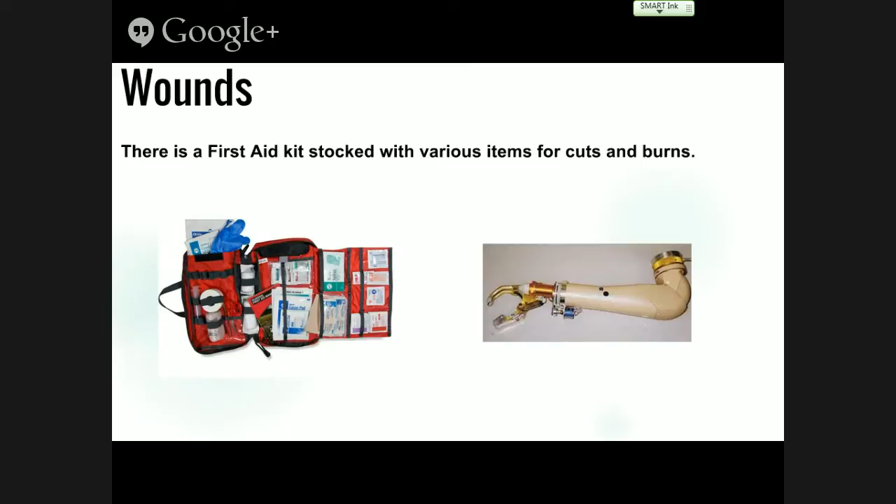Part of being a safety captain is knowing how to take care of wounds, so we have a first aid kit with various items. We have gauze pads, just in case you have a cut, to stem the bleed. We have ice packs in case you get hit with something and have swelling. We have gloves, alcohol pads, bandages, but we do not have prosthetics. So please don't amputate any limbs, because that would be really, really bad.

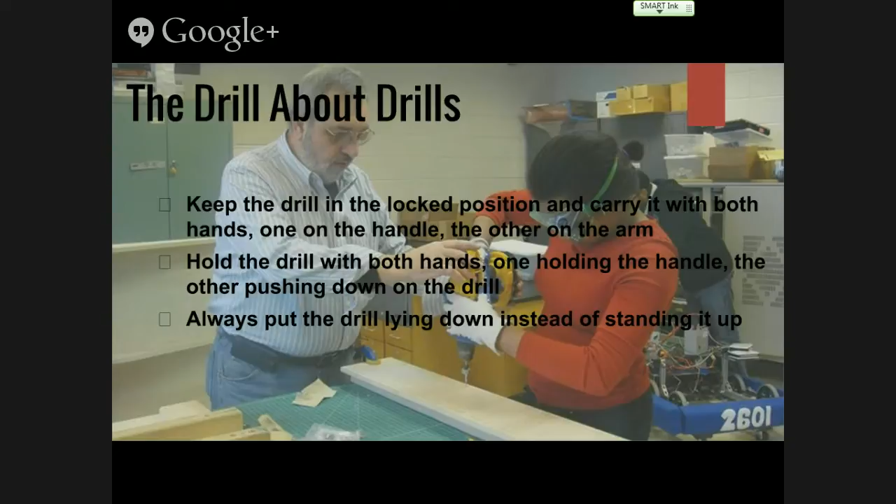Now, the drill about drills. When carrying a drill, keep it in the lock position and use both hands to carry it, one on the handle and the other on the arm. Hold the drill with both hands when you're using it, by the handle and by the arm as well. And always put the drill lying down instead of standing up, because if it's standing up it's more likely to fall and hurt somebody.

Now, soldering. Always wear face protection and use a mask. Solder in well-ventilated areas. Never touch the iron because it's hot and you could burn yourself. Always keep it in its holder when you're not using it, because that would prevent it from falling and hurting somebody else. Also, wash your hands after soldering and use lead-free solder.

Now, with great power comes great responsibility. When using an electrical power source, always power down the robot by opening the main circuit breaker. This you should do when people are either working on the robot or nobody is in the pit. This would prevent anybody from accidentally getting hurt by the robot, just in case it misfires.

Also, if you have any pneumatics on your robot, be sure to release all the pressure. That would decrease the chances of anything like firing and hitting somebody. That actually happened to Marcus last year during the competition. The robot shot his catapult and hit him right in the head.

Okay, so batteries are life. So you want to take good care of your batteries, and do not use any damaged batteries, because if you use any damaged batteries, you have a chance of it exploding.

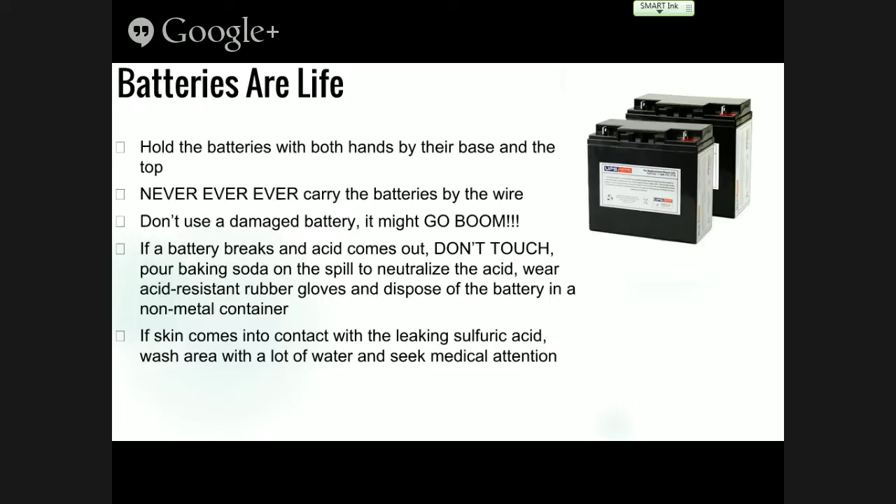Now, if anybody is injured, you have to tell a mentor, send the injured person to the EMT, and fill out a medical incident report form. That's the standard procedure if anyone gets injured, and it's important to follow that, because you want to take care of the person immediately to prevent any other damage that might occur.

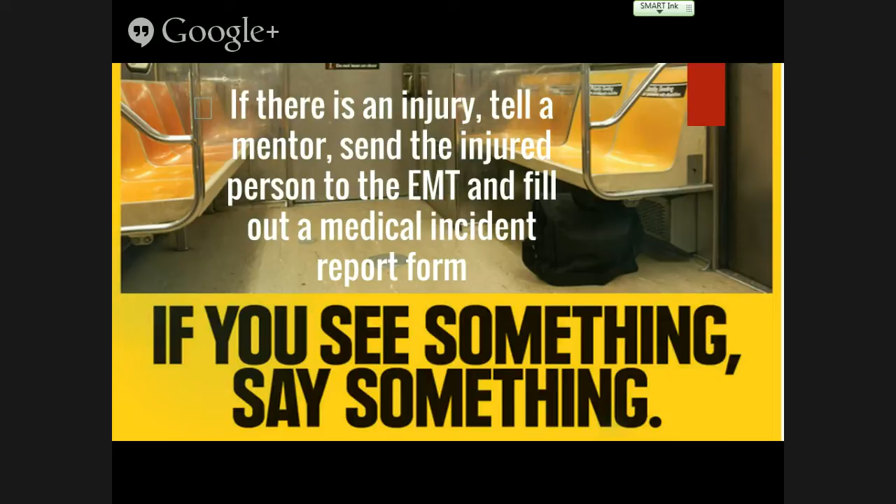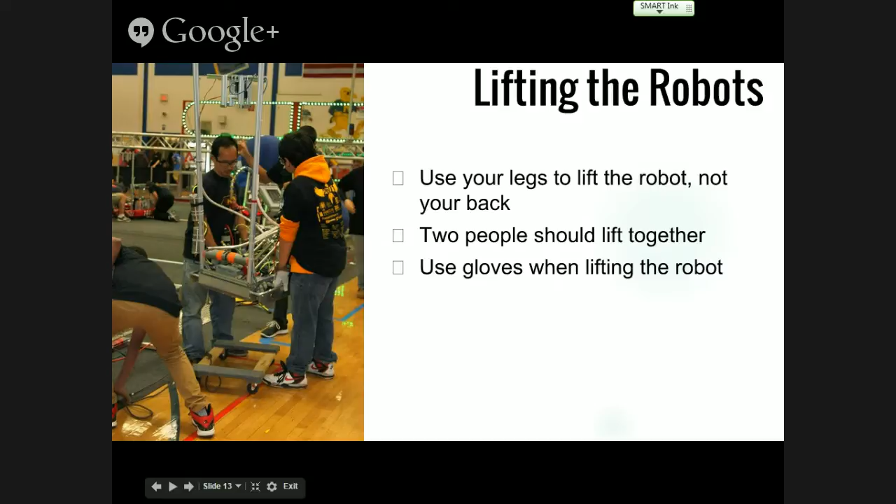Now, when lifting the robot, always use your legs to lift the robot and not your back. Two people should always lift together, and use gloves when lifting the robot.

The most important rule in safety is use your common sense. Common sense is like your best friend for life. Common sense will keep you safe most of the time, and always be aware, be rational, and don't be immature.

People are in unsafe situations. Their lives are in your hands. You have 1 minute to name 3 unsafe things and describe how to make it safe in order to save each person. Okay, guys, we gotta save all these people.

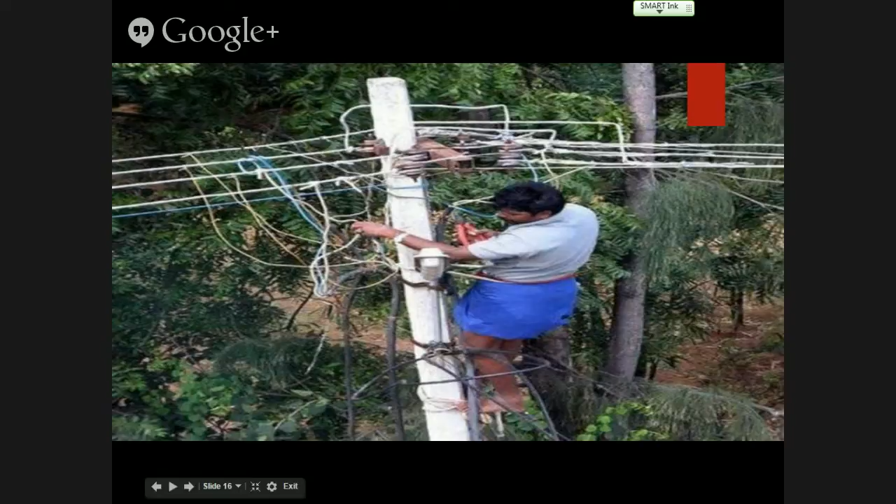Alright, guys, name 3 things, 3 unsafe things. Anybody raise their hands? Okay, that's 1. That's 2, one more. Alright, that guy is safe. Good job. Now this one. Marcus? Okay, that's right, good job.

Anybody else? Come on, we need 2 more things, or else it's gonna... Yeah, that's another thing. Okay, one more, got like 30 seconds left. Come on, Marcus again. Okay, alright, he's safe now. What about this guy?

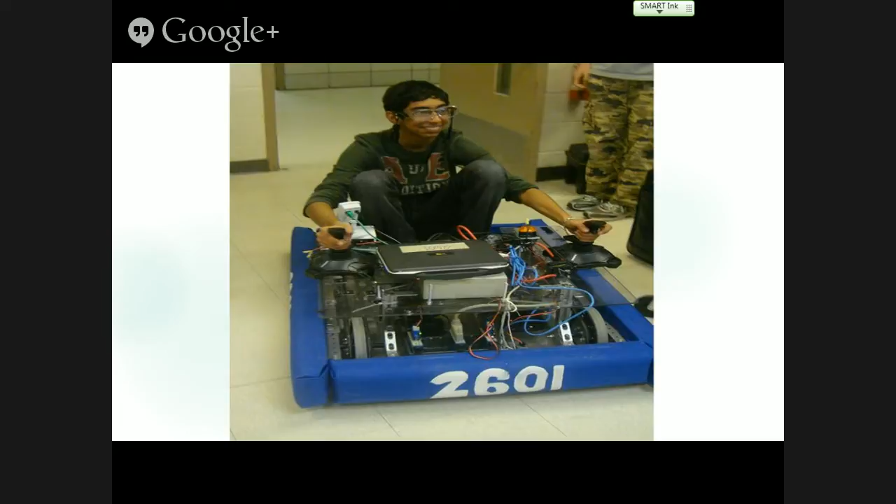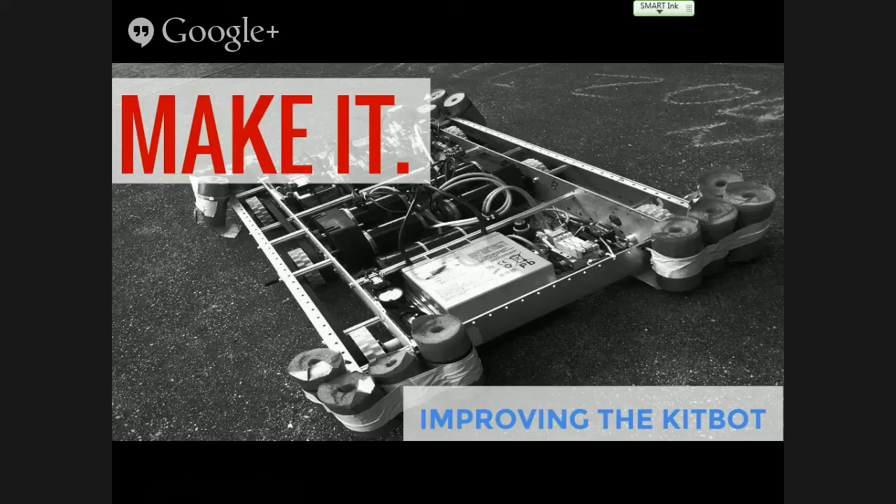Okay, hi, my name is Jan. I'm the president of the robotics team here at Townsend Harris, and I'm going to be telling you guys about drivetrains.

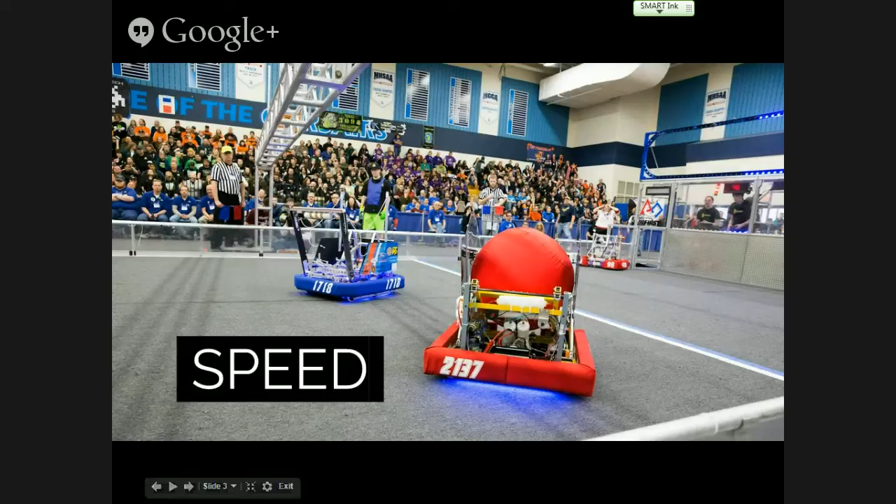Okay, so what is a drivetrain? The drivetrain is basically the mobility of your robot. It's how we move during the game, and it's very important. But what do we want from a drivetrain? What we want from a drivetrain starts first with speed. You want to be a fast robot to be a competitive robot.

But with speed, you also need pushing force, and pushing force is to get out of sticky situations like T-bones. And with that you also need agility. So we need speed, pushing force, and agility to have a very good drivetrain and a competitive robot. And what are we given by FRC?

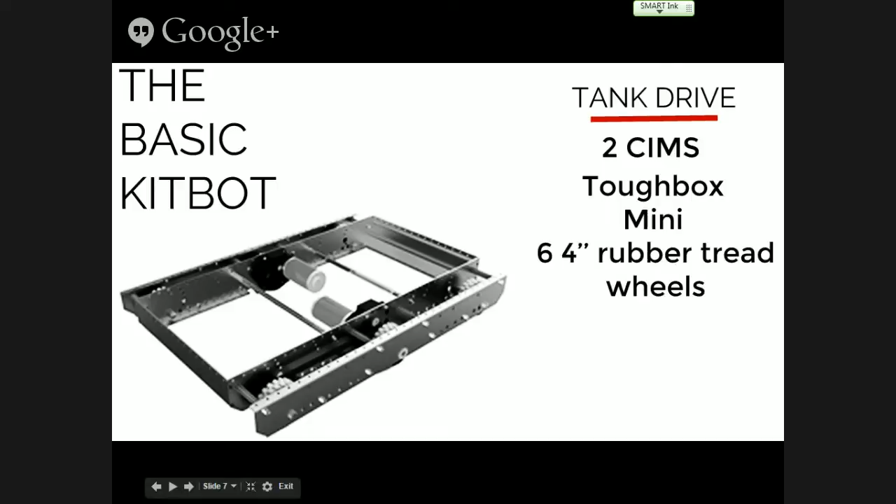We're given the Kitbot by FRC, and what does the Kitbot give us? So the basic Kitbot is a tank drive. And with this tank drive we have two CIMs - we have a Toughbox Mini, which is the gearbox, and we have six 4-inch rubber tread wheels, and we'll get to the speed later. I'll show you how to figure that out.

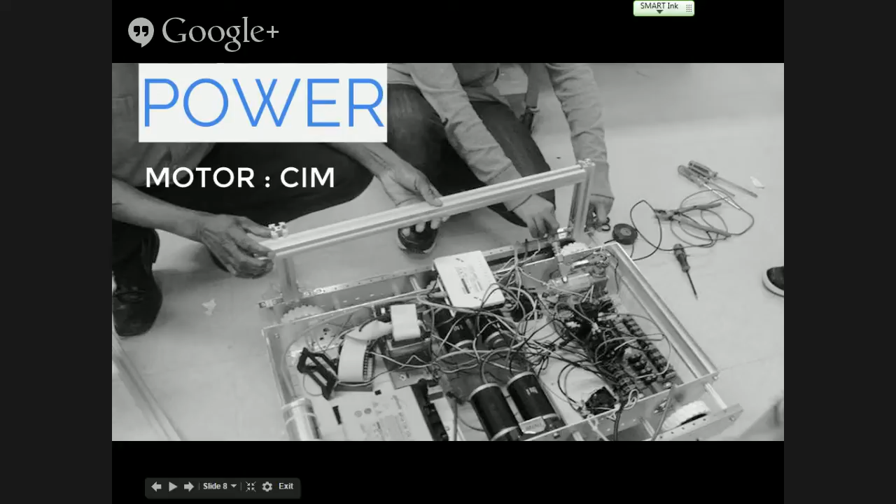So first we start with power, and our power is given to us by CIMs. So these are the CIM specs: we have the free speed, which is the rotations per minute - basically how fast the motor allows you to turn the wheel. And we have the stall torque, which is the rotational force. So basically what we learn from this is that more CIMs equal more power.

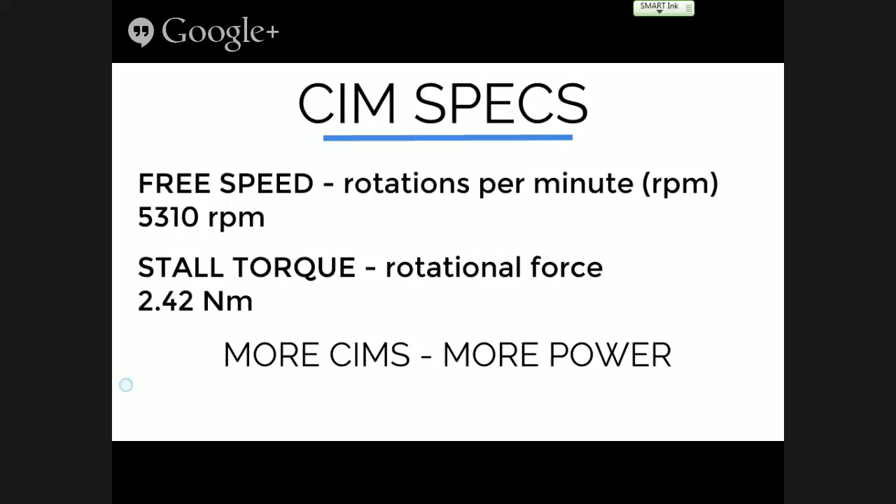Next we have the reduction. If I were to stick a motor straight onto a wheel, it would rotate 5,310 times per minute. That is too much, and it would be unsafe on the field, and you wouldn't really be able to drive with it. So what we need is a gearbox, and the gearbox that's given is the Toughbox Mini.

So we're going to talk about gear ratios. In the Toughbox Mini, we have a 14-tooth gear, 50-tooth, 19-tooth, and 45-tooth. The gears have these teeth to pretty much give it an identity, and it makes sure that they work together to create a different gear ratio that states how fast your wheel will be moving.

First stage is 50 divided by 14, and then the second stage is 45 divided by 19. The reason we're dividing these is because we have to divide the driven gear by the driving gear. The driving gear here is attached to a motor, which drives this gear, and then this gear drives the 19 one. So now the 19 is a driving gear, which is then driving the 45 teeth gear. Are we getting that?

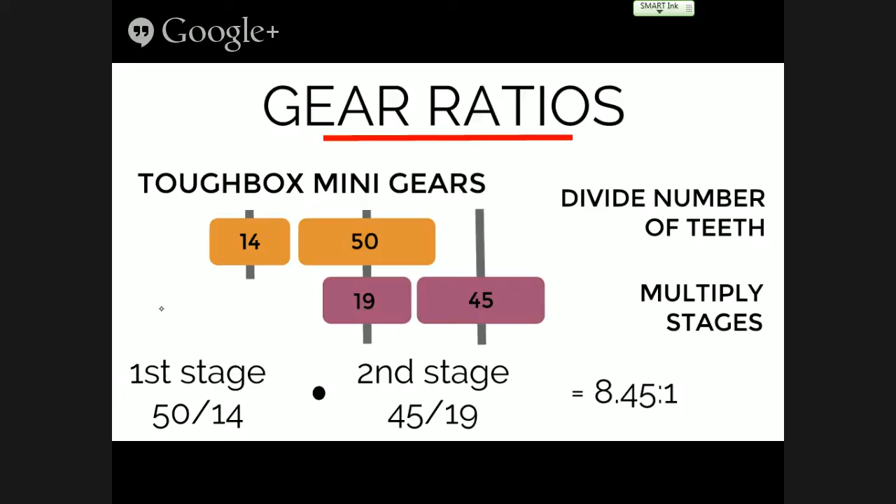Okay, so this is only the different gear ratios for each separate part of the gearbox. Now we need to bring it together to get the overall gear ratio. To do that, we multiply the stages. So we multiply 50 divided by 14 times 45 divided by 19 to get an overall gear ratio of 8.45 to 1.

Now what does this 8.45 to 1 gear ratio tell us? First, it tells us how fast our wheels are going to be moving. To figure that out, all you have to do is divide the rotations per minute from your motor by the gear ratio that you have, and you would get the rotations per minute of your wheel. Next, we get the torque that is given to the wheel. To do that, you would multiply the stall torque given by the motor by the gear ratio that you have, and you would get the torque of the wheels.

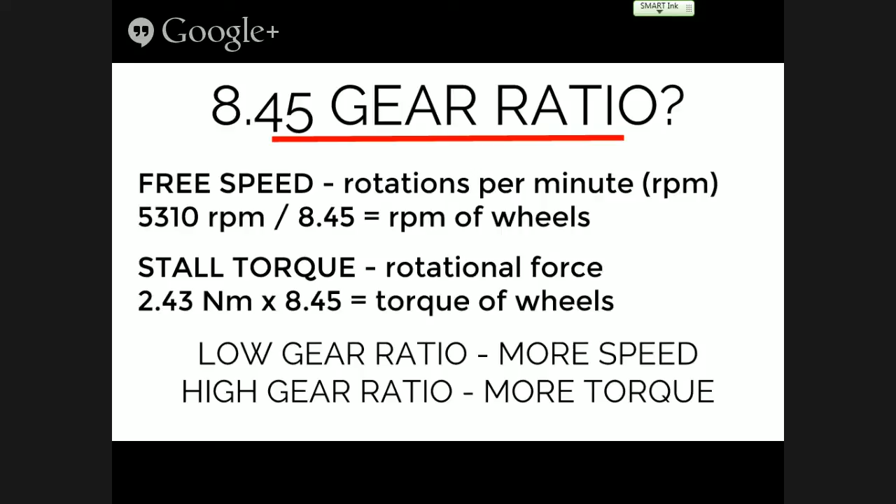So with this, we see that there's a give and take situation. When you want more speed, you have to go for a lower gear ratio, and when you want more pushing force or torque, you would need a higher gear ratio. So the rotations per minute really helps us in figuring out the speed of your robot.

So what we're given is the RPM, which is the rotations per minute. This is the angular speed, so it's how fast it's rotating. We need to change that into a linear velocity, and velocity is just speed. So we use this formula, which is the linear velocity equals the angular velocity times pi times d, which is the diameter of your wheel.

So with that, we go into wheels. The wheels that we're using in the Kitbot are 6 4-inch rubber tread wheels. Now, why are we talking about wheels? Why would that be important in a drivetrain? Well, pretty much it affects the speed and torque that we're given.

The linear velocity is affected by the size of your wheels. It's the diameter that affects it the most. It also affects the pushing force for the same reason, the diameter that affects it. It also creates frictional force. While we're driving, there is a force that is fighting against us, so we don't want to drive, but we have to beat that force to actually drive. The size and material of your wheels matter in your drivetrain.

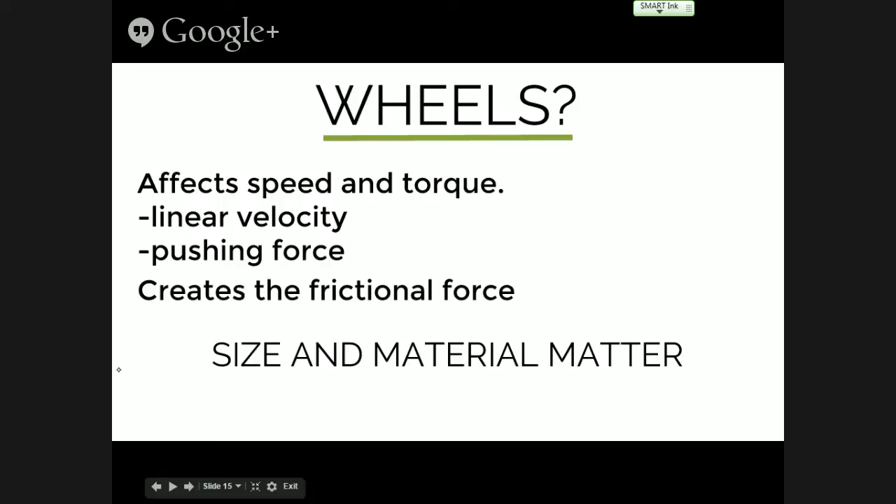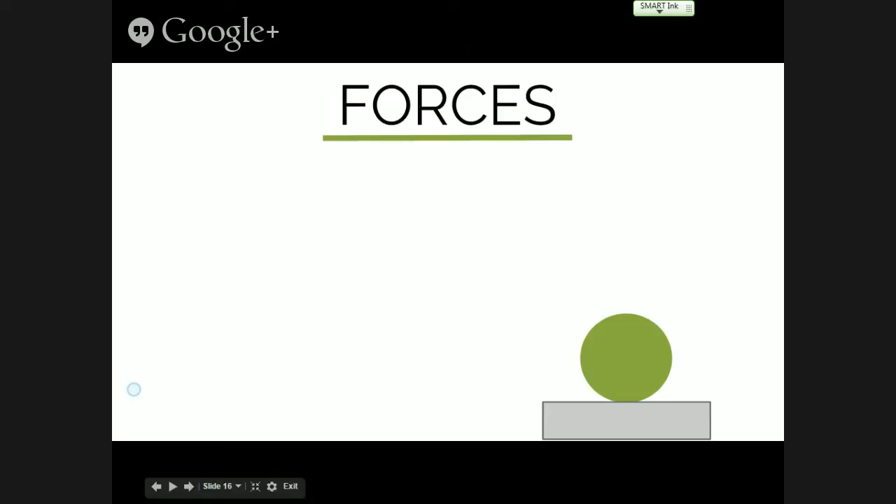Now we're going to talk about forces that are happening inside this drivetrain. So that's a nice wheel on a carpet. We have the gravitational force, which is basically the weight of your robot. To find that, it's just mass times gravity, and gravity is a constant, which is 9.81 meters per second squared. This force is going down because gravity is pulling us down.

Next, you have the normal force, which is basically the support force. It's the force that we are pushing on, pushing back on us. So the normal force is going against gravity. They're both equal because we don't have a wheel flying up in the air, so they're the same here.

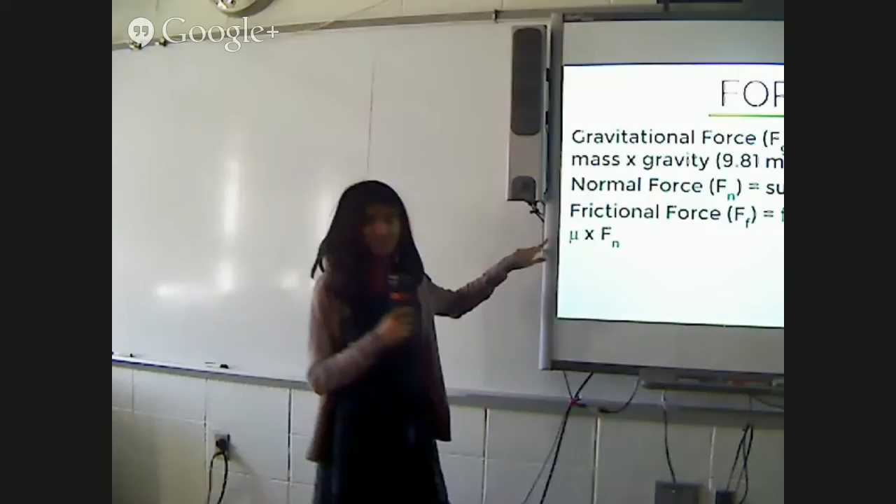Next, we have the frictional force, which I like to call the fighting force in this situation. To get the fighting force, you need the friction coefficient, also known as mu, which you can find on AndyMark. They tell you the coefficients of your wheels on carpet, because that's what we use.

Next we just have the force that's given to the wheel, which is going backwards. So the frictional force is what's making us drive.

So we're seeing with the Kitbot, it's either a speed or pushing force situation. But why not both? I present to you shifters, the way that you can get both in a very simple and easy way to attach to your Kitbot. What we used was the 3 CIM ball shifter.

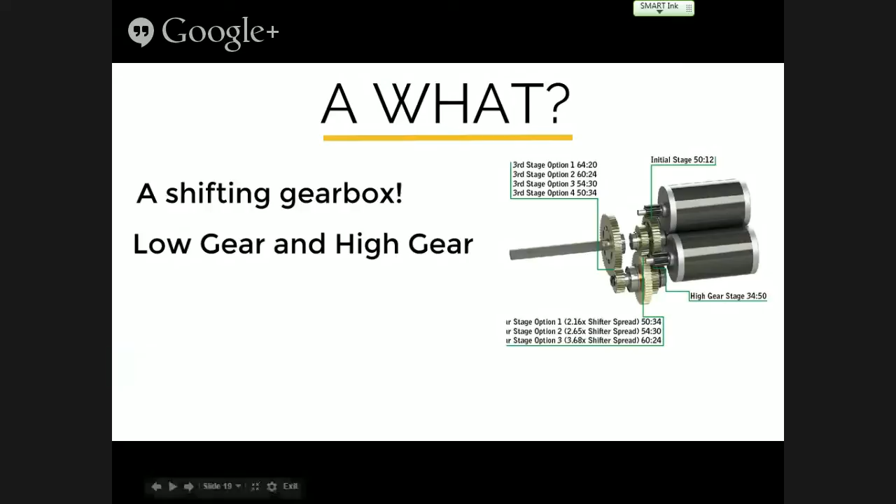What's a shifter? Basically, it's a shifting gearbox. In this situation, we have both a low gear and a high gear in this gearbox, so we get both speed and pushing ability. But how do we do that?

So first, we have to engage these gear ratios, and to do that we have 2 main methods. We have the ball shifter, which engages by using pneumatics to put balls into little holes around the side, engaging the gear. Then we have the dog gear, which does the same thing, but in a weirder way — it has to fit into those specific holes that were made.

And when it's only on one stage, the 50 tooth becomes an idler gear — right now it doesn't matter, it's going straight from 12 to 34, so it's only one stage. So you'd divide 34 by 12, and you get 2.83 as the high gear.

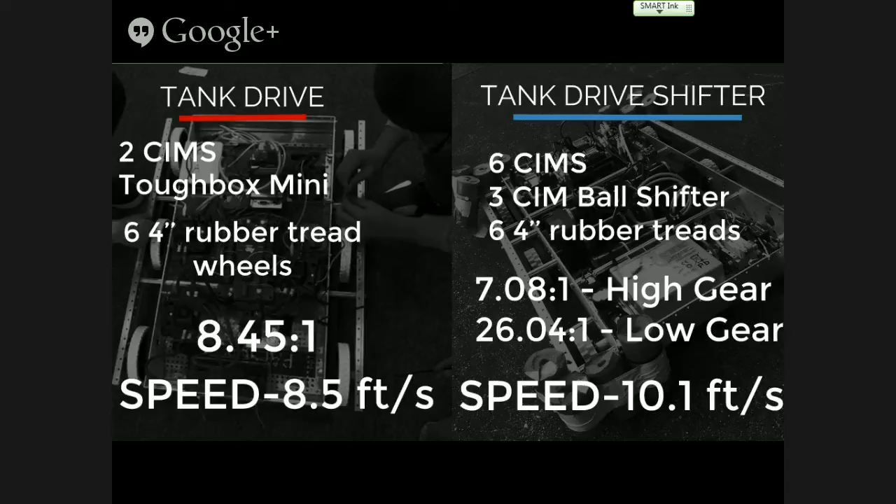With the tank drive shifter, we have 6 CIMs, a 3 CIM ball shifter as our gearbox, 6 4-inch rubber tread wheels, and both a high gear and low gear ratio — 7.08 to 1 for high gear and 26.04 to 1 for low gear, giving us a speed of 10.1 feet per second. So as you can see, it gives us more speed, and also the ability to push if we need to. We have videos from

the summer when we tried using shifting gearboxes.

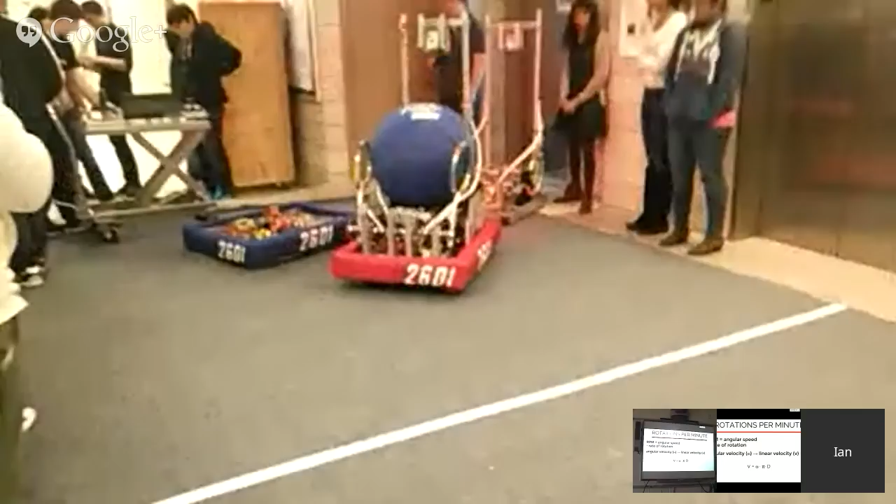Could you film for me? Point this at the robot. Right now it's live streaming.

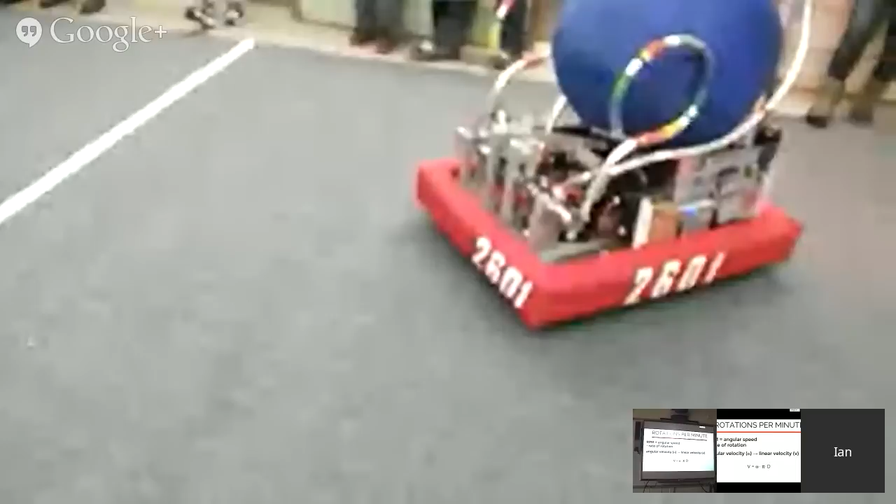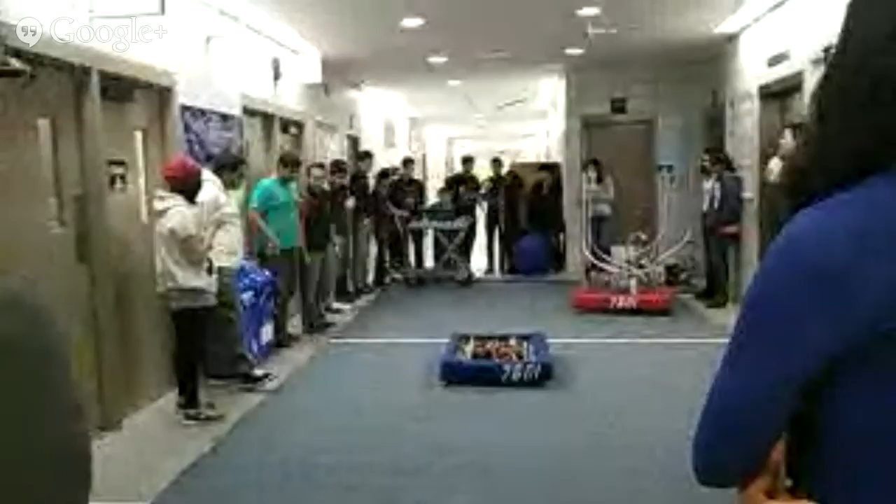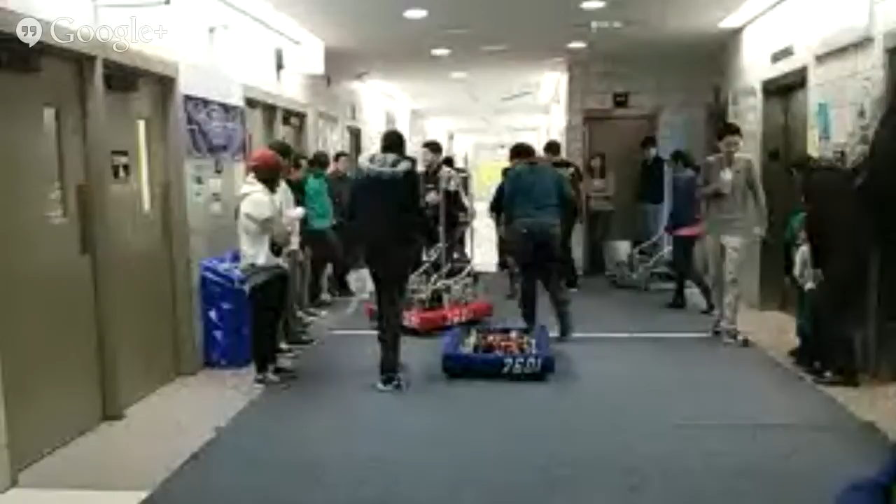Yeah, I know, I saw it. Wait, Ian.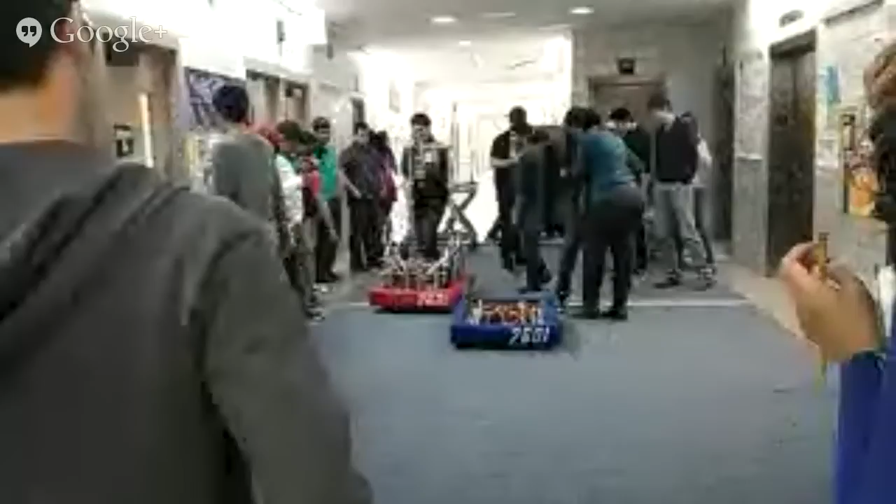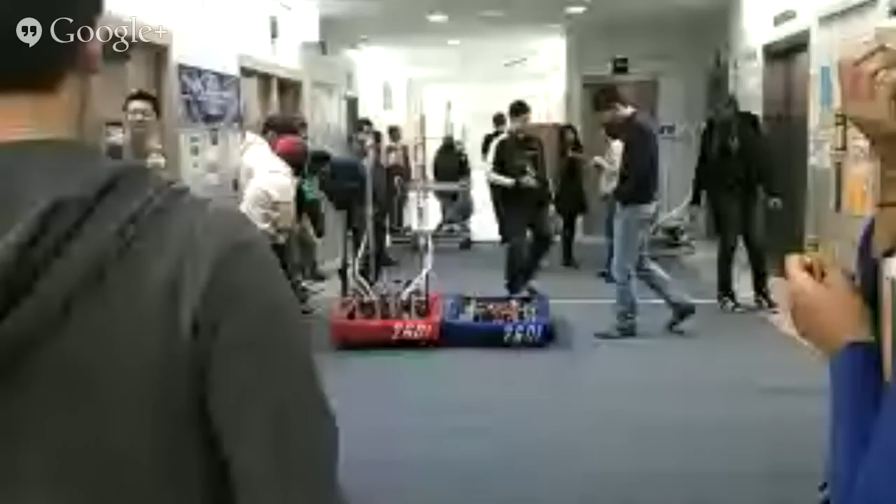We were actually over in Toronto. And what was really funny is they went to weigh in the tanks, and so we drained the tank. I don't know how much weight air really is. Compressed air has quite a bit.

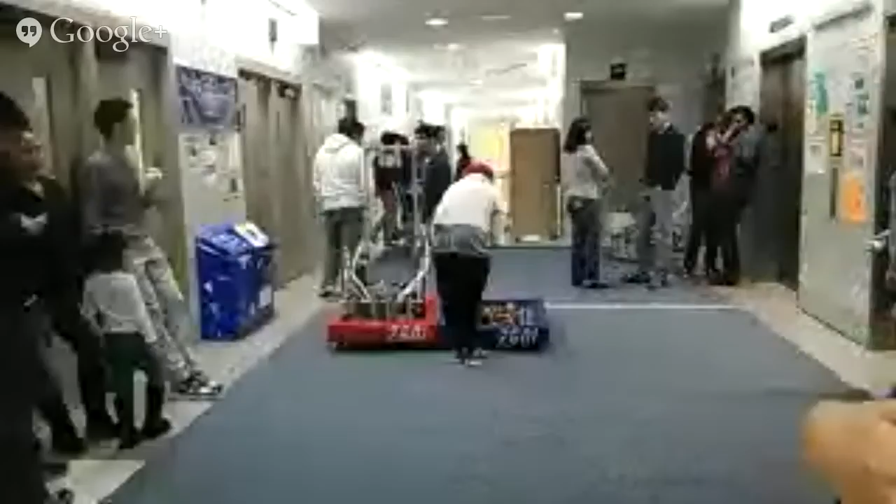So, on the last one, you don't need to talk.

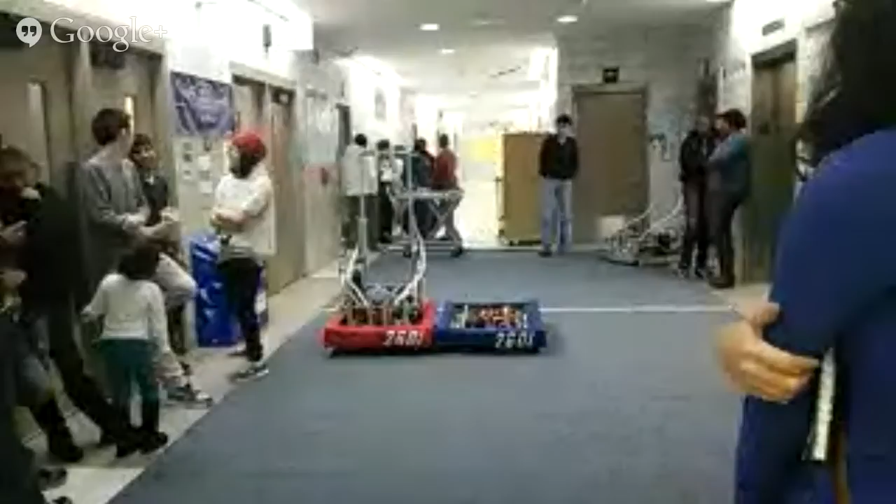Ian. What you call me? It's like his own thing.

Thank you, on standby. Yeah, not yet. Stop, Jamari.

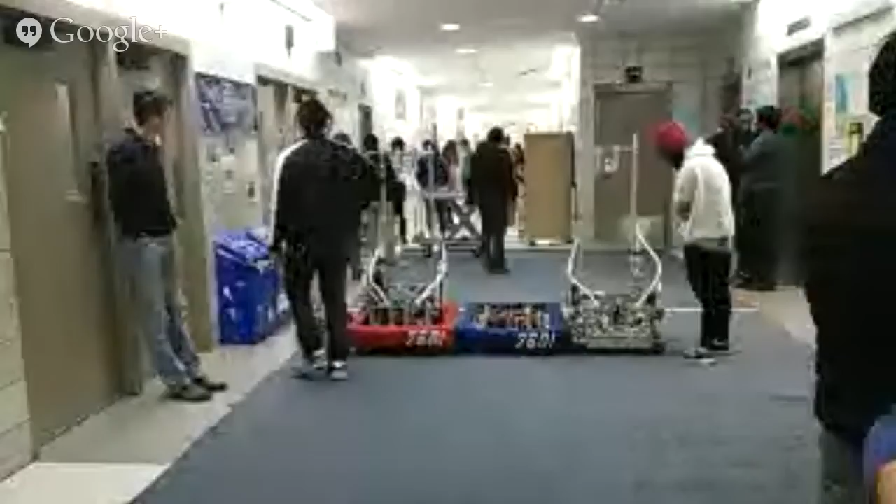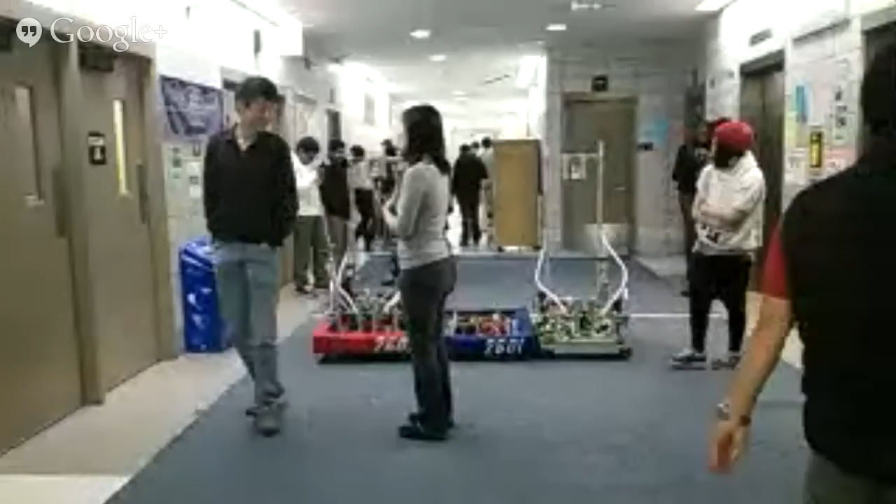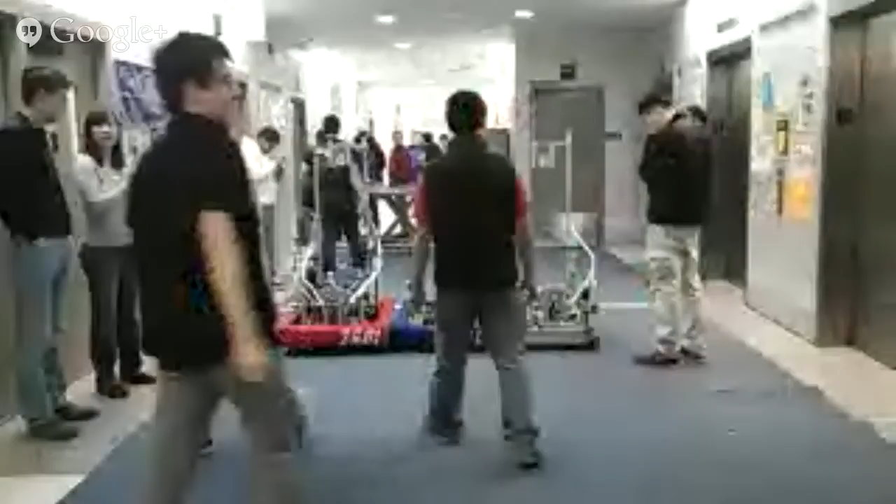Yeah, Ian, do you want to turn it off? Stop. I don't know, well, the screen is...

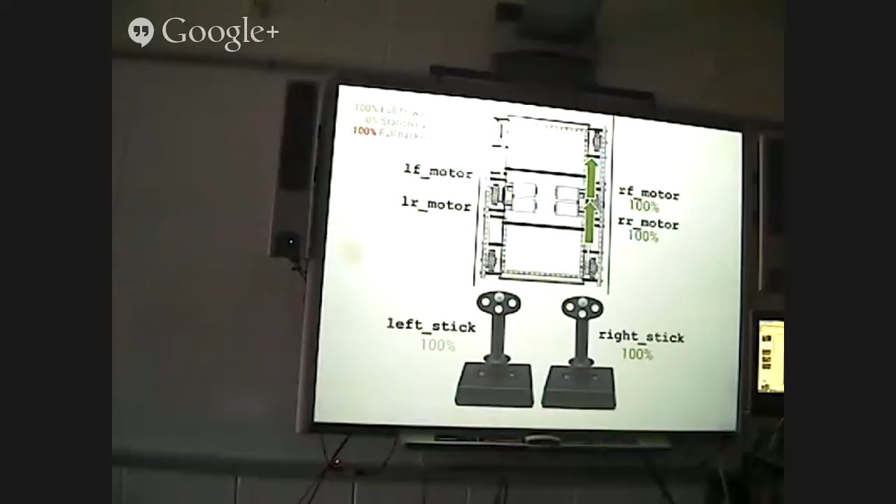Direction now, and likewise on the other side, I feed the same value to the left motors. Everyone with me so far? Cool, so that means my robot goes full forward.

The code to do that is actually quite simple. Earlier we had our method of controlling it where we just control one side with one joystick and the other side with another joystick. Now all the gray stuff we've already written, the things I'm adding new are in black. So all of these new talon declarations, I have to tell the robot where my talons are plugged in, and then I just set it to the same value.

So if I run that code, here's my code for a drivetrain with 4 CIMs. There we go. So here I've set up my talons, and here I'm setting them all to one joystick. Does anyone know why I have the negative sign in front of one joystick?

Just curious. Yeah, okay, but why would I want to move it backwards? Anyone else? All right, yes, Wayne.

Right, exactly. So on a drivetrain, my motors aren't necessarily facing the same direction. I have 2 motors facing right and 2 motors facing left. I have to reverse the direction they're going to keep going forward.

So there it was. Oh, nope. And if I run that code - now I have 4 CIMs, and you're going to notice a little bit of a speed difference.

So I'm actually facing the wrong direction right now. Let me go backwards at full speed, and full forward. And if I step it at 0.5, up there it goes, at a 0.5 second rate.

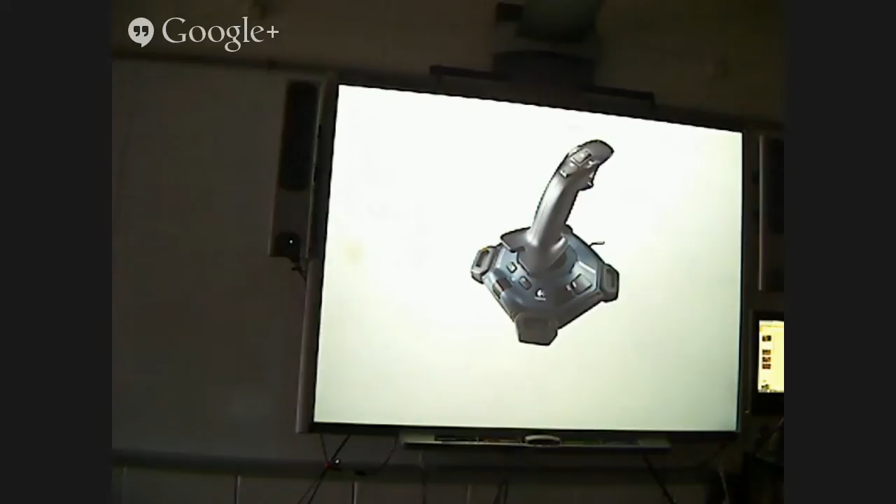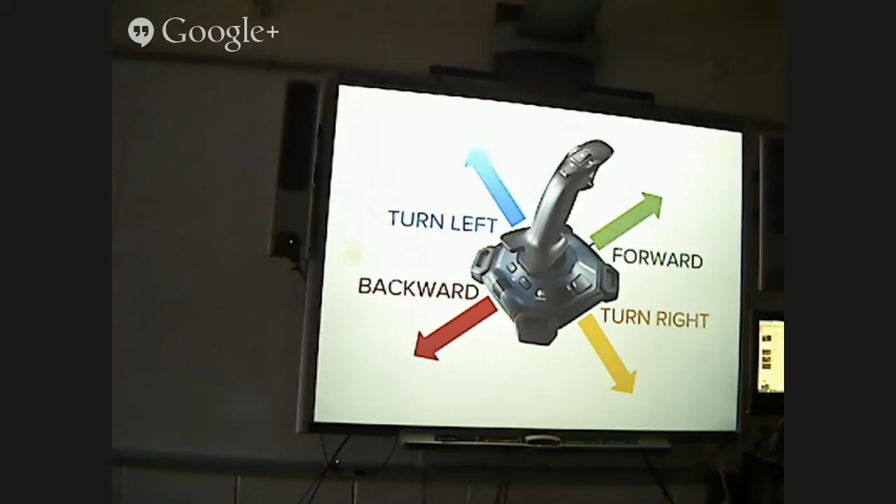Now let's say I only have one joystick, which is what the large red robot Tomahawk was doing. I want to control my robot so that it goes forward when the joystick goes forward, turns right when the joystick swings right, goes backward when the joystick goes back, and turns left when the joystick swings left. This is commonly called arcade drive, because like an arcade machine, you use a single joystick to control the direction of the robot rather than two.

Here's a top-down view of that joystick, with a forward y-axis and a horizontal x-axis. I can label these axes as the movement and rotation axes. For the y-axis, I want to control how fast the robot is moving forward and backward. For rotation, I move it left and right. So if I start with my joystick in the center, move and rotate both equal 0. This is just a Cartesian plane.

If I move my joystick full forward, move equals 1, rotate equals 0. If I move it all the way back, move equals -1, rotate equals 0, and so on. If I move my joystick all the way to the right, rotate is 1, move is 0, and all the way to the left, move is 0 and rotate is -1. This is the basis for our next arcade drive algorithm.

So now what happens if I have my joystick in an intermediate position, like the top right? Now move is at its full value, 1, and rotate is at its full value, also 1. If I move it to the back, move is -1 and rotate is -1, and so on.

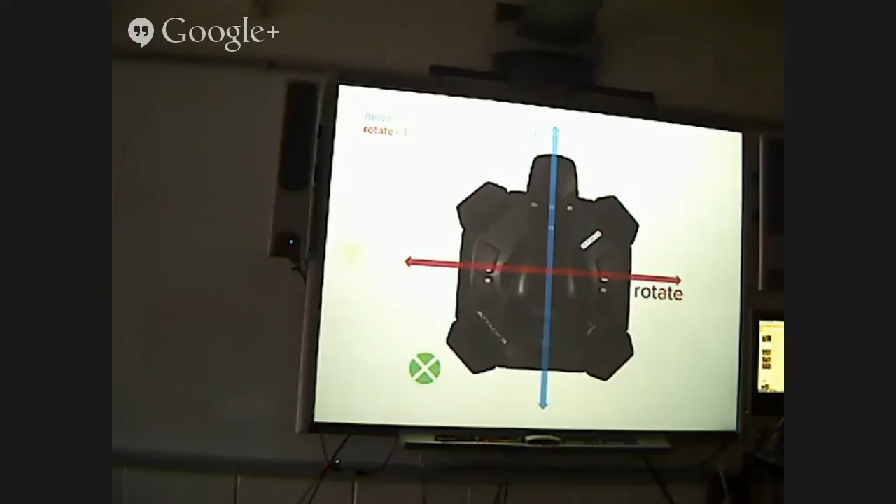This lets us simulate a very simple algorithm: the left side of the drivetrain should be the value of move plus rotate, and the right side should be move minus rotate. If we look in the WPILib source code, it's actually quite similar — they just have a few more exceptions to handle, like a joystick going haywire.

So if I had my joystick all the way to the right, move would equal 0, rotate would equal 1. Now my left side of the drivetrain equals 1, and right equals 0 minus 1, so negative 1. Now I'm turning in place.

We can also implement this code in our Python script. Here I have arcade two-wheel drive, implementing the algorithm I just showed. You can ignore all the self things — that's just Python syntax for object-oriented programming, for those of you familiar with it. Everything else is just: set the left motor to the y-axis, or move, plus the rotation axis, which is x, and set the right motor to the y-axis minus x — exactly what we just saw.

If I run that code, now I'm only controlling with one stick, so I can totally ignore stick 2. I'm going to step it in 0.5 second increments. So now it's not doing anything. If I set full forward on y, it should move forward.

If I set full forward on x, so now move equals 1, rotate equals 1, I turn — and I turn in an arc just like that. If I set x equal to negative 1, I turn in the other direction. This is the control algorithm which lies at the basis of most FRC robots. So if I just wanted to control a robot with a single joystick, I only have to write about 2 lines of code, basically.

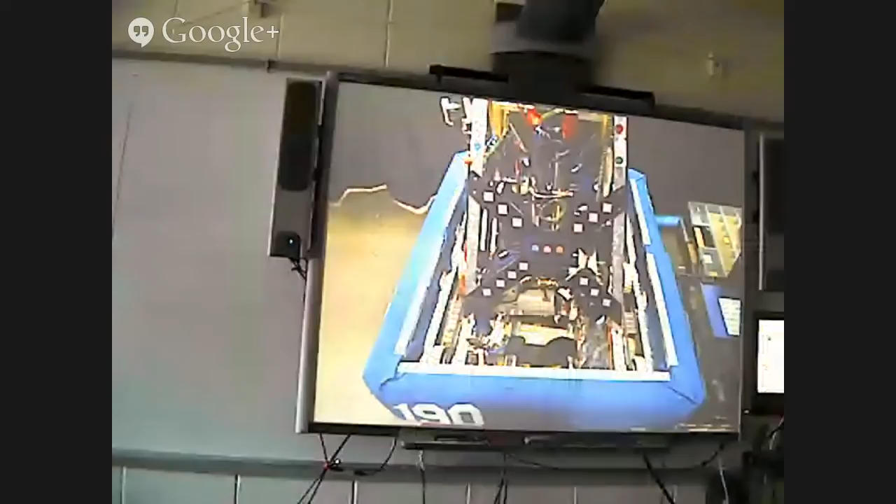WPILib has utilities built in to support different drivetrains, so we don't have to write all these algorithms ourselves. The background is actually 190, WPI's own team. The two functions included are arcade drive and tank drive. So if I wanted to perform this behavior of arcade drive, I could just call WPILib arcade drive. Here's my example of arcade drive.

This is WPILib's arcade drive system. Instead of declaring each left motor and each right motor like before, I still have to feed those values into WPILib, but now I'm going to define something called robot_drive, which could be any title - I could call it Vijay drive or whatever. So I could put in the left motor and the right motor, and WPILib's robot drive utility will automatically spit out the values I need to drive a robot.

So I'm going to feed in the stick, the joystick that I'm using to drive the robot, and now robot drive is going to handle everything for me. So I'm going to run robot drive now.

If I run that and I step it in 0.5 second increments just to show you what's happening until I operated, now we get full forward, full backward, an X rotation to the right, and an X rotation to the left, because I'm going backwards. Right, there we go. So all pretty simple so far.

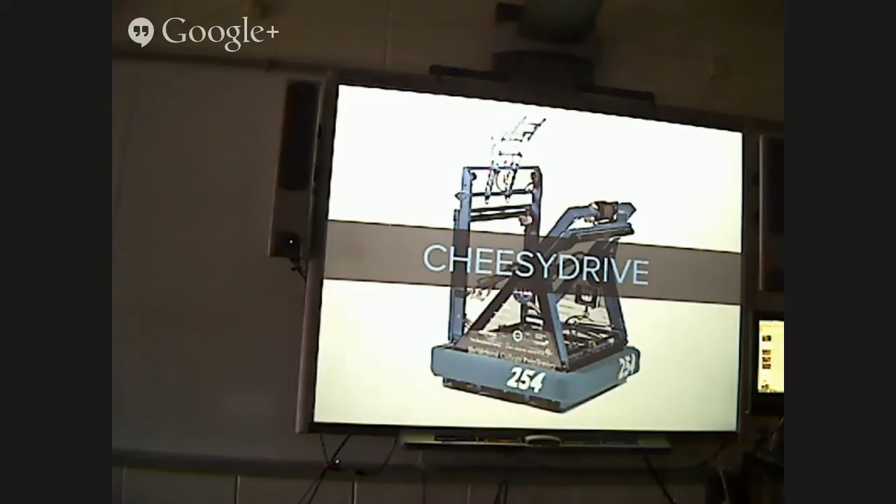Let's say you now want to take this to the next level. Team 254, world champions this year, uses a system they call Cheesy Drive because they are Team Cheesy Poofs. Cheesy Drive is a system that's also been used by teams like 971, who are endemic to California. And that system can be very effective. So here's 971 in a match of Chezy Champs, and I want you to see how they're driving.

That small area they turn in, and the way they move effectively around their opponent, is because they have an effective control system.

Other teams use alternatives. I don't have time to explain every team's drive algorithm, but Team 33, for example, uses something they call Culver Drive, named after a guy named Brian Culver, where they use a gamepad. One traditional problem with a gamepad is that if you want to move a drivetrain, you can really only go full forward and full backward. It's hard to get an intermediate value because it's just a small range of motion.

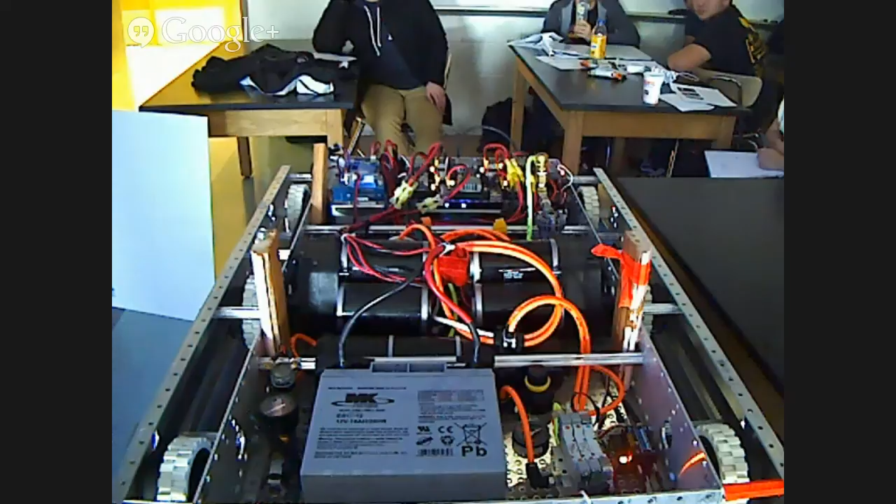Anybody have any questions so far? Cool, all right. Yeah.

So the program I'm currently running is a version of Dustin Spicuzza's RobotPy. They have a simulator and direct robot control. You can upload your code to the robot, but let's say you're at home and you don't want to drive to school in the middle of winter when it's freezing and snowing, and your robot's in a bathroom like we have it, and you don't want to go in there just to drive it. You can now just run the simulator and it'll control the robot in 2 dimensions. That doesn't control the robot directly, but I could do that using RobotPy.

The simulator is just a part of RobotPy. They're trying to integrate simulators into C++ and Java. It's called Gazebo. They did a beta over the summer, but we haven't heard back from that yet. So right now, the simplest version is just RobotPy.

There you go. So that's the link you can visit to see what's going on. Let me just try to connect to the robot now. And I'm now connected. So here I am connected to this robot.

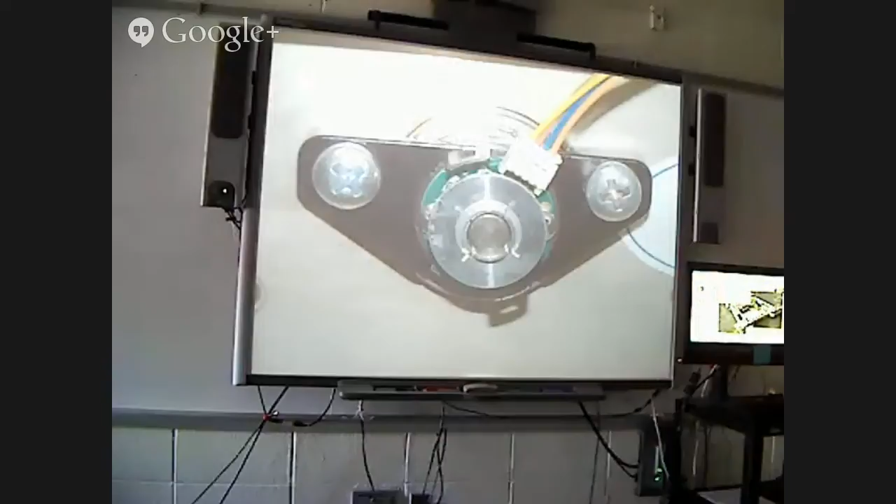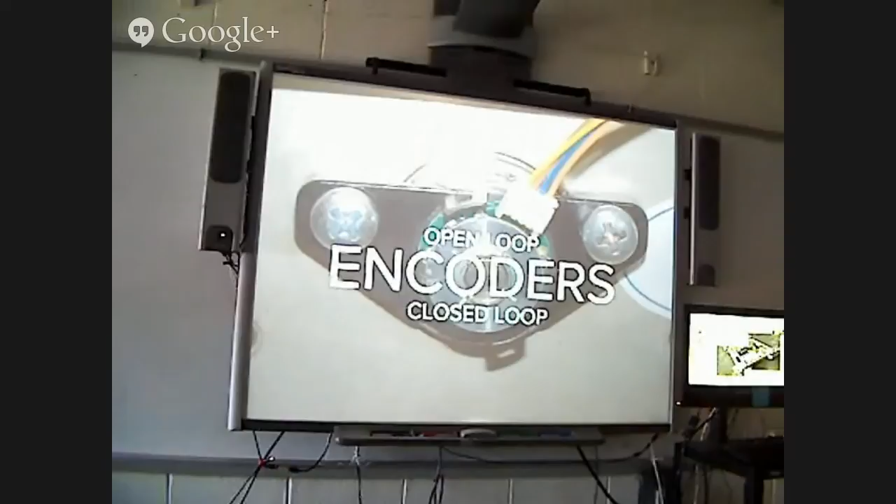Let me get that into implementation. So I had encoders on there. The general method of control is something we can call open loop or closed loop control. Up to this point, what I've been telling you is just how to tell a robot what to do - the robot doesn't tell you anything in return, you're just giving commands to the robot. With an encoder, you can perform what's called closed loop control, which means the robot is giving you feedback.